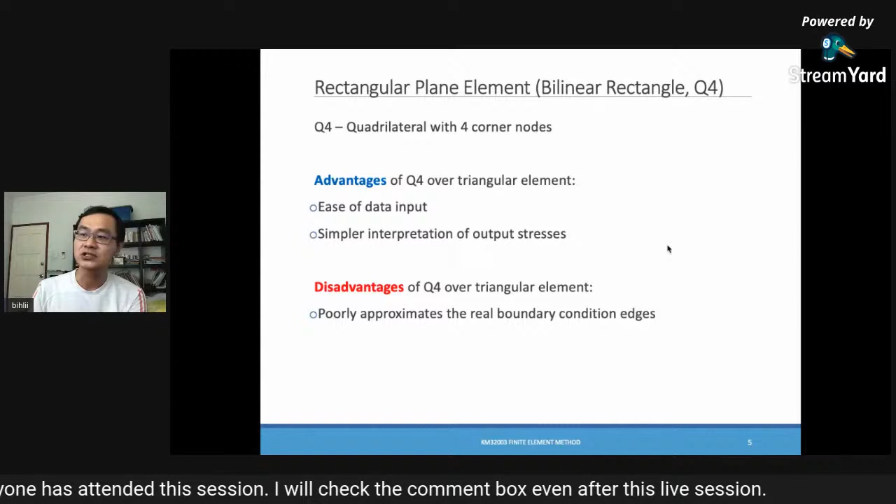So the advantages of using this Q4 over the triangular elements is the ease of data input. You can easily enter the coordinates and so on. Then there is simpler interpretation of output stress, easier to calculate. But there are disadvantages of the Q4: they poorly approximate the real boundary edges, especially when there is a curve. So if we use a rectangular type of element, you may have difficulty to actually approximate the curved part, right?

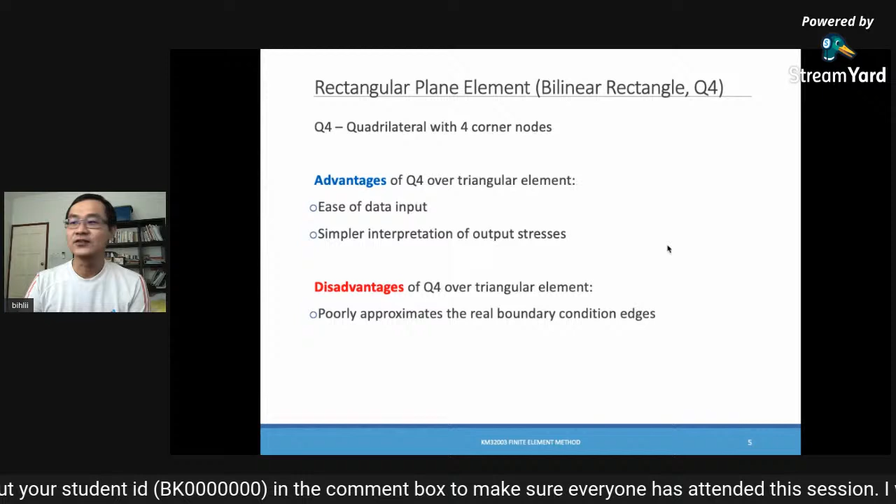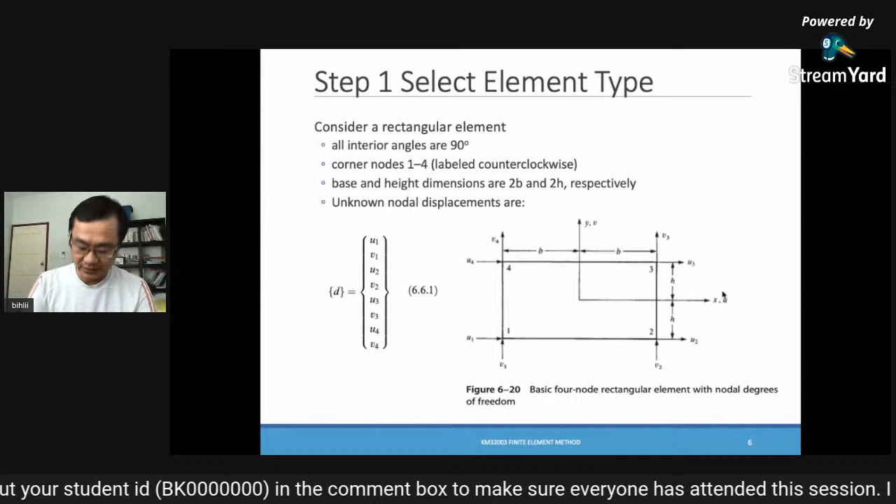So the steps to derive this Q4 are very similar. We will just go through as quickly as possible. So step 1, you will have to select the element type. Here we try to see how to derive the Q4. The Q4 basically is just a rectangular element with 4 nodes. You have seen the nodes 1, 2, 3, 4 being labeled in the counterclockwise direction. The base and the height will be 2b and 2h as given, and there are unknown nodal displacements.

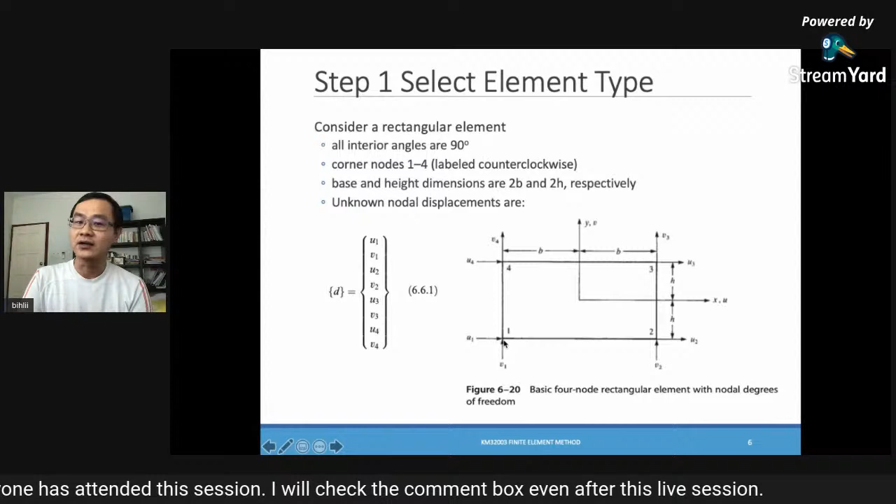So for these unknown nodal displacements, as we can see, there is u1 and v1. u1 and v1 represent the displacement along the x direction and the y direction for node 1. So you have node 1, node 2, node 3, node 4. Every single node has 2 degrees of freedom. So there will be 8 unknowns for the nodal displacement, right?

Then we will start to select the displacement functions. Since we have 8 degrees of freedom or unknowns, we will have to create the displacement functions with 8 constants. So we have a1 until a8. For u, we have the linear displacement function u = a1 + a2x + a3y + a4xy. Similar for v, right?

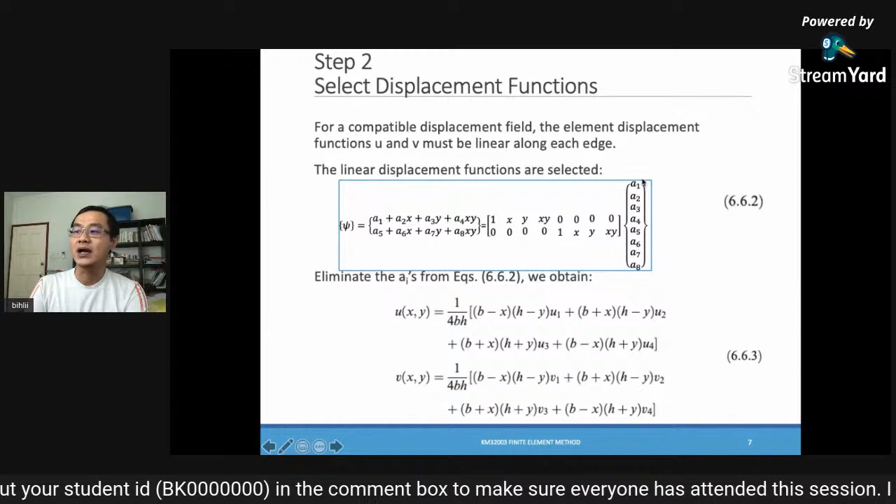So how can we do this? We just go through the previous lecture. We have tried to formulate the shape functions by using this. What we can do, we will form them into a matrix, a1, a2, a3, a4 until a8, in order for us to eliminate the constants a. So here you can form the matrix [1 x y xy] to multiply by a1, a2, a3, a4 to get the u linear displacement function. Similar for the v displacement function, we have this matrix.

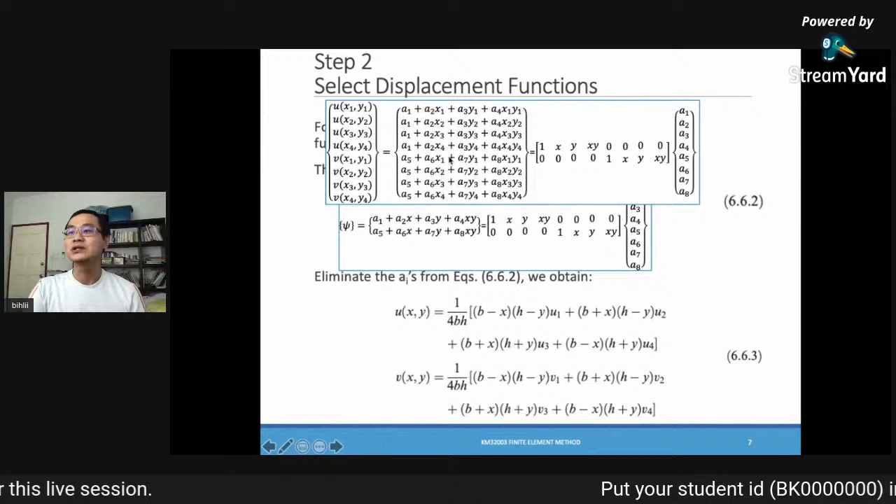So if we want to solve for a1 until a8, we need 8 simultaneous equations. So we write them or expand them into the nodes. Since we have 4 nodes, 1, 2, 3, 4, we rewrite the equations for each of the nodes, corresponding to this. Therefore, from this function, u(x1, y1) represents u1, and u(x2, y2) represents u2.

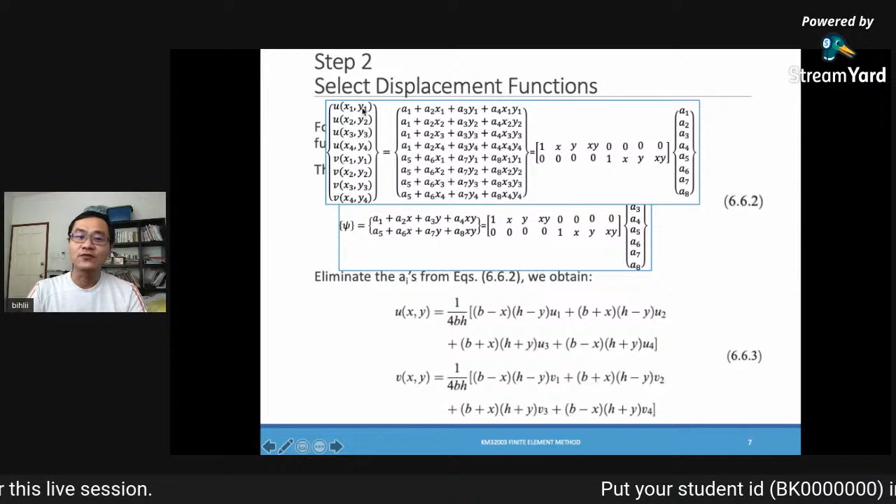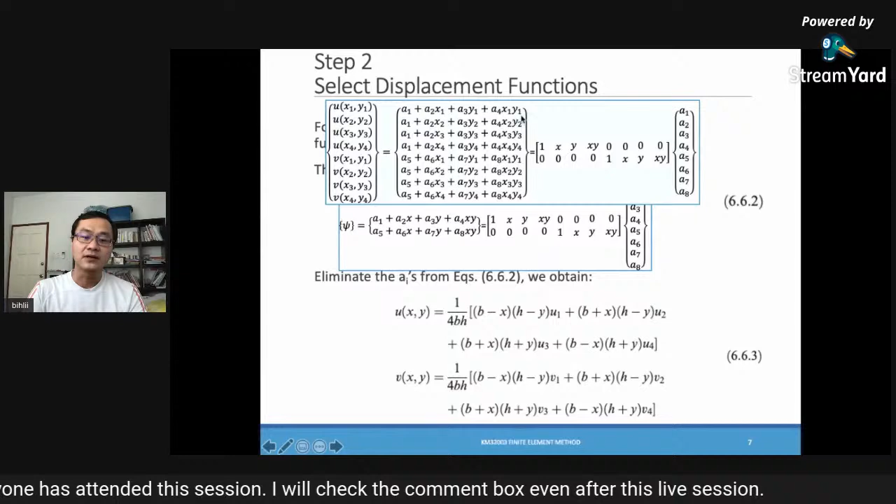So what we can do is form the simultaneous equations. You have u1 = a1 + a2x1 + a3y1 + a4x1y1. So that is how we can form the equations, and we can run through the 8 equations. These matrices are just to help you run it in a program, so that it can do the calculations and solve it on its own.

All right, so by doing that, we have 8 equations, solve them simultaneously, then you can solve for A1 until A8. At the same time, we can try to eliminate to form these U and V equations. So eventually when we remove all this, we will obtain this linear displacement for U and also for V, as given in equation 6.6.3.

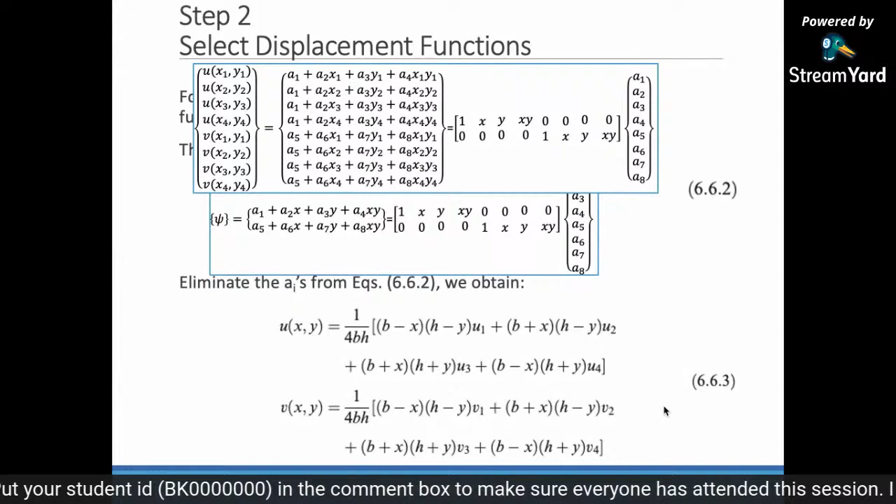So now from that equation itself, if we try to locate this kind of form, we will see that the shape functions appear. The N appear from the previous equations. So this shape function itself we can write as N1, N2, N3, and N4, which represent the shape function at node 1, node 2, node 3, and node 4.

So graphically, for us to visualize, the shape function at node number 1, we can see that the weightage or the value at node number 1 will be equal to 1, for both x direction as well as y direction. So if we want to directly check whether the shape functions derived are correct or not, we can have a quick check actually.

We can form the linear functions for this part. So this represents how the weightage actually changes, shifting from node 1 to node 2. So if we form the linear equation, this is just y equals mx plus c. We can get N1 equals minus x plus b divided by 2b, to represent this particular part.

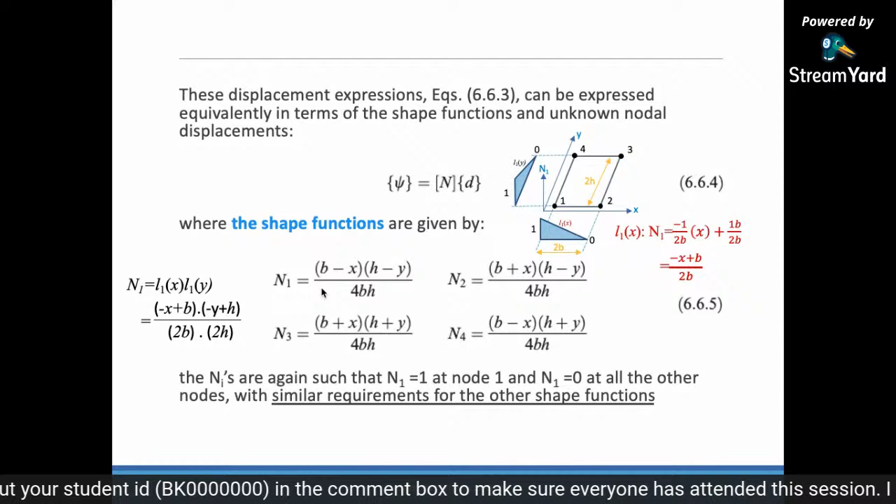So once we have the shape functions, now we can rewrite them in a matrix form. In this course, many times we rewrite them in matrix form so that they can be systematically computed, just like what you have learned in numerical methods. You can do this using MATLAB, Scilab, or even Excel. So if you don't have those tools, you can always depend on Excel to run your calculations.

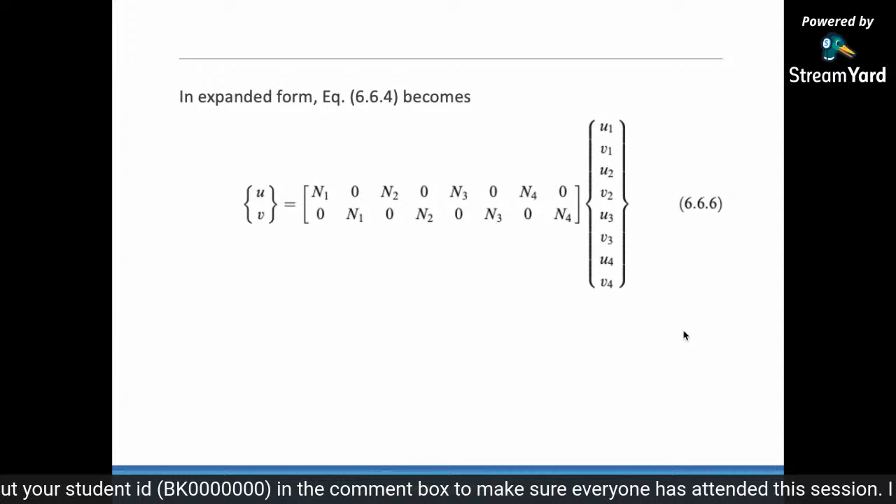Excel has built-in functions to solve for matrices. So you just Google from there, you can solve them. But there are some limitations on the size of the matrices, so you have to be aware of that.

So once we have obtained that, now we move to the strain-displacement and the stress-strain relationships. For this part, it's very similar. We already have our defined relationship for the strain in X, strain in Y, as well as the twisting part of the strain, given by this. So here, what we do, we just do the partial differentiations with respect to our previous equations.

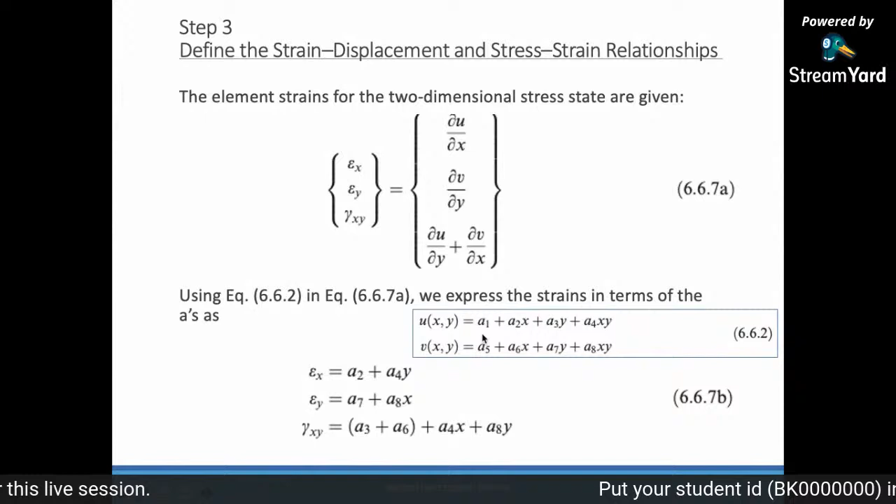So since we already know A1, A2, A3, and A4, assuming that you already performed the simultaneous equations previously, we can calculate accordingly. So if we take derivatives with respect to X, we will obtain this equation. With respect to Y, we will obtain this equation, and so on.

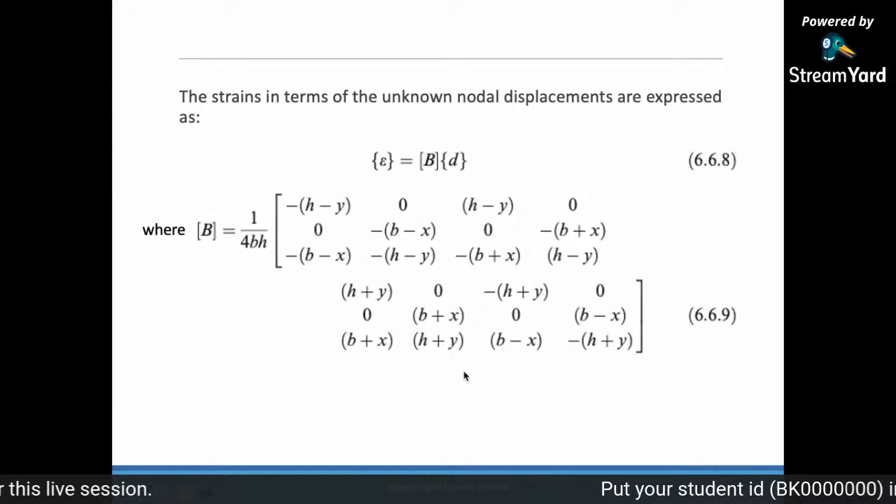And then all these strains are related to the nodal displacements. So again, we try to rewrite in this form, and we identify or separate them from the displacements, the unknown parameters. So we notice that there is this B matrix. So this B matrix is given as such. So you can try that on your own.

Similarly for the stress, once we know the strain, we can always calculate the stress, where this stress is just a multiplication of matrices, depending on your problem. If it is a plane stress problem, then we use equation 6.1.8. If it is a plane strain problem, then we use 6.1.10. So when we multiply them together, we will obtain the stress matrix.

So all these are computationally intense. So you can try it by hand, but later on, the computer will do better.

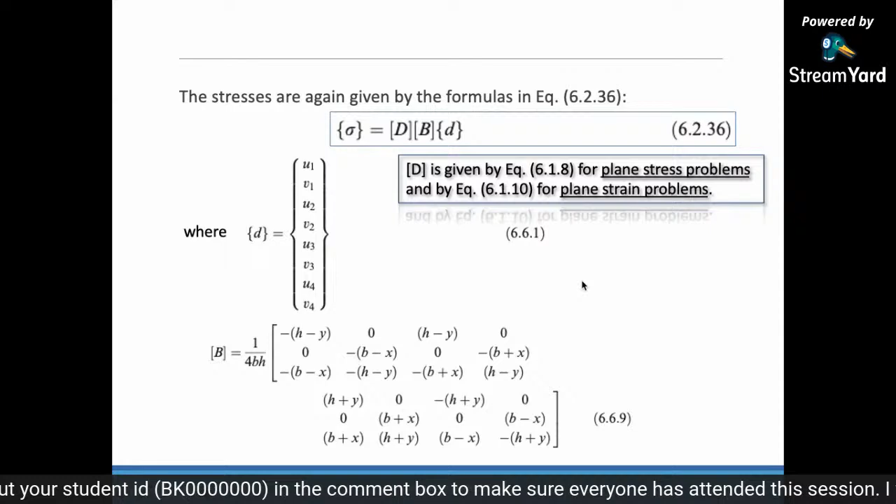Then after we obtain that, we will start to derive the element stiffness matrix and equations. This part depends on the stiffness matrix defined by the integral, a double integral given in the previous lecture. Here we rewrite it as 6.6.10; you can always look back at the previous equation numbers. When we integrate these double integrals, we obtain what we want: the element K, the stiffness matrix itself.

These double integrations are mathematically represented here, but in the computer or the software itself, they run numerical integrations. That's why methods like Newton-Cotes or Gauss methods come in. These are common methods used in the software itself.

Different methods have their advantages and disadvantages, but most software now tends to use Gauss quadrature methods to solve the integrations. The numerical part on how to solve them is not part of this subject. It's just knowledge. If you are interested, you can always check that on your own.

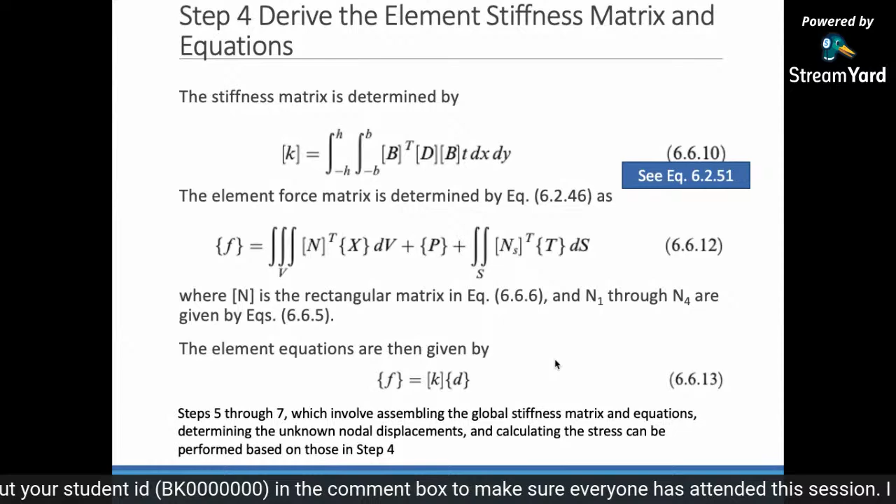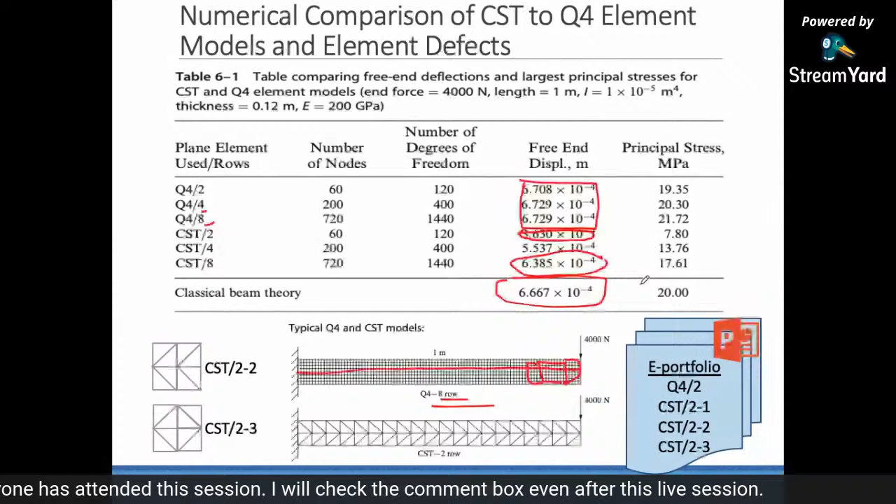For the e-portfolio, as I mentioned previously, try to simulate these conditions again. Since this uses 1 meter, you may have a lot of nodes. So I recommend you define your own conditions: half a meter, 0.2 meter, up to you. Form your own problem, use the same cantilever beam, apply your force, and check the displacement and stress corresponding to the theory. I would like you to do only four types of conditions.

The first one, the Q4 with 2 rows, then the CST with 2 rows again, but this one is a different way of meshing. You can see that the meshing directions, the load is pointing with an arrow like this. The CST-2, I wish to see the opposite direction. And the third mesh way is in this form.

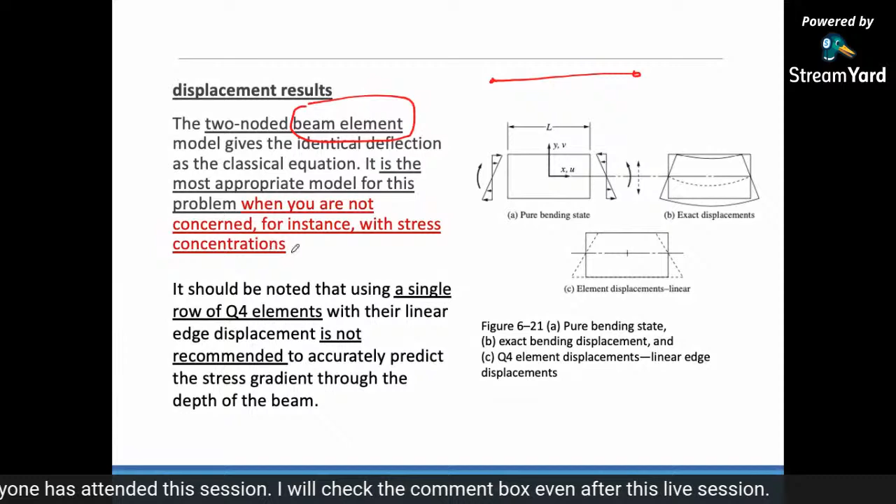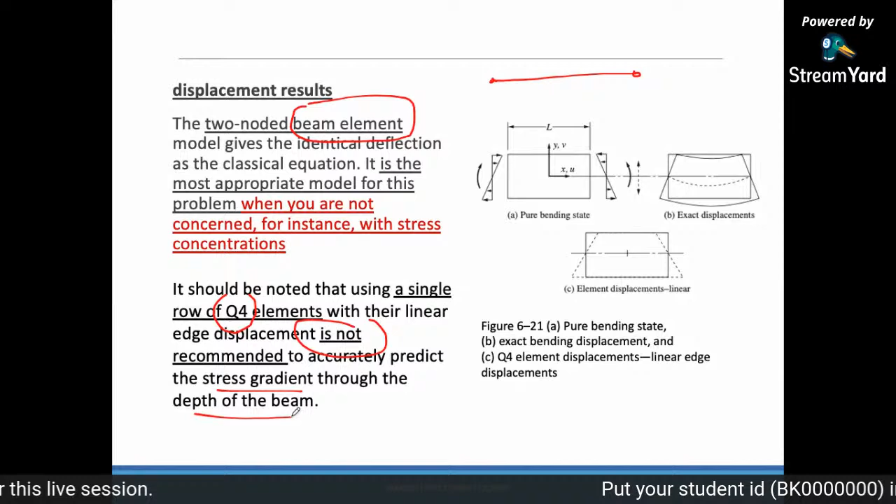So this is the general idea of it. Note that a single row Q4 with linear elements is not recommended, because of the behavior of the linearly decreasing or changing stress. There is a stress gradient through the depth of the beam. That's why, if possible, use 2 or more rows.

This is where, when we model the finite elements, the direction of the force is important. It helps you decide the number of meshes along that particular direction. So this is critical information for you when you're doing the modeling. So here there is one famous, or maybe popular, keyword.

Shear locking. Shear lock itself is more commonly known, or in other words, they may call it parasitic shear. What happened is, as we can see in the previous example, the CST itself produces poor results.

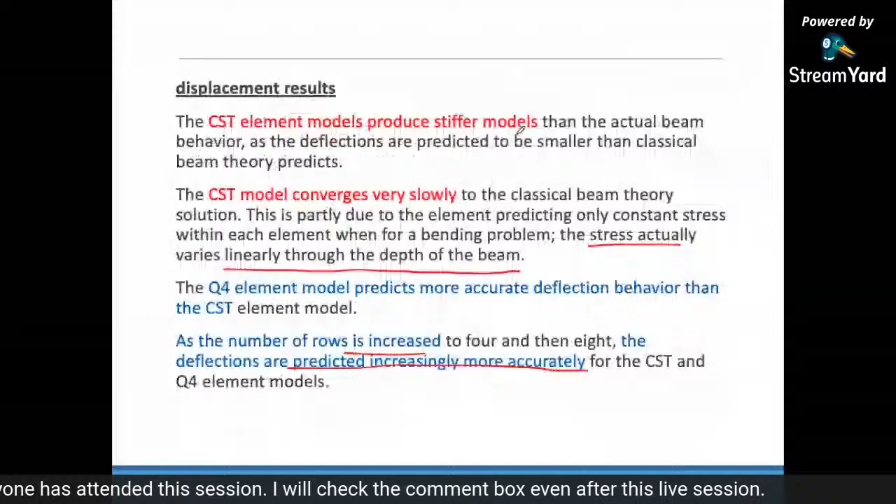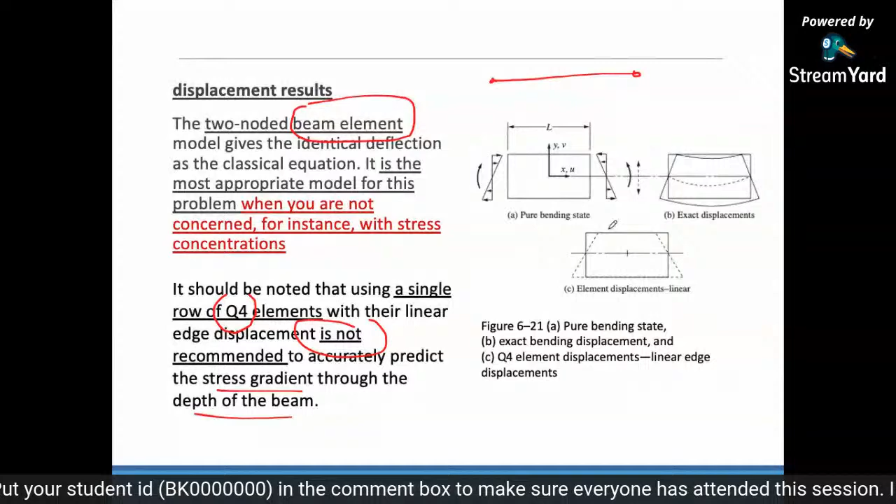Because you can see with this element row, the displacement is very small, meaning the beam itself is very stiff. Why does this happen? We call this phenomenon shear locking. In this shear locking, the CST has a false shear stress that occurs inside, trying to absorb that energy. So whenever it absorbs this energy, the energy that's supposed to go for bending is now lost. So we call this phenomenon shear locking, or in other words, parasitic shear.

So what we can do: in problems where plane strain conditions exist, and the Poisson's ratio approaches 0.5, the maximum value of the Poisson's ratio, the mesh can actually lock. This is where it's confirmed to lock, meaning the elements or the mesh will not be able to deform anymore.

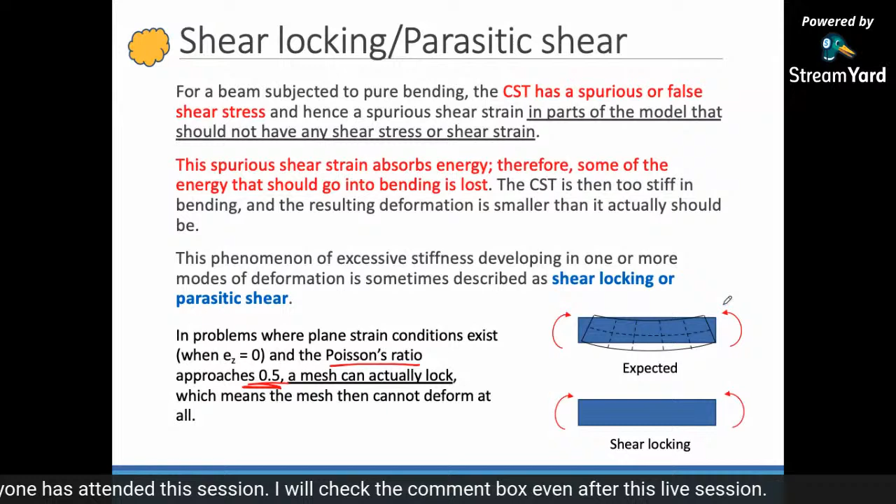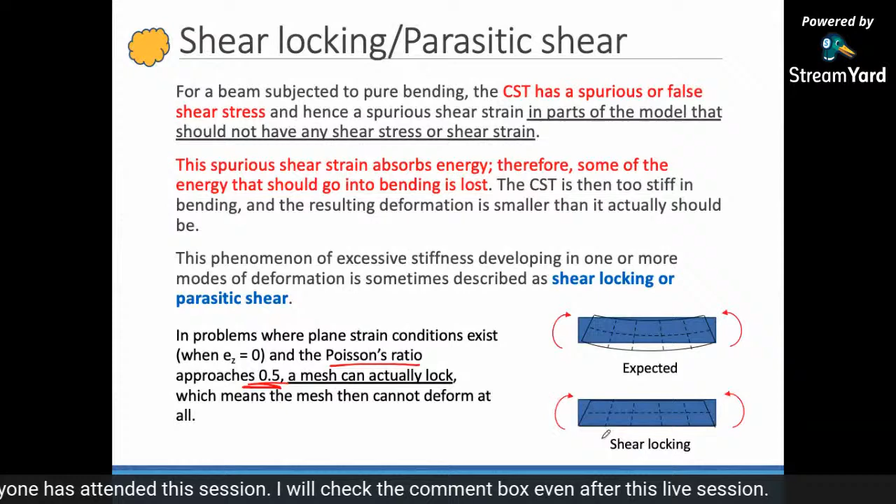So a simple illustration: this is a beam. When we apply a bending moment, in the actual case, we expect bending. But what happens in shear locking is that the displacement of the node shifts but does not bend down. That is what we call shear locking, and this will result in error in the stress itself, because there are no changes in terms of displacement throughout other nodes along this member.

So as we can see, the shear stress itself is dependent on the displacements. So the first thing, whenever someone tries to analyze the FEA results, the experts will always look at the displacement result first, even though the intention is to check the stress, because the displacement gives us a visual, or more a visual kind of image, a visual type of effect that we can imagine.

If some forces are acting, you can predict visually, in your mind or from experience, how it changed. That gives us very important information before we check whether the stress changes correspond to the displacement itself. So first thing, check the displacements first, whether they correctly represent the actual conditions or not. Otherwise, whatever stress results you get may not be true to the real situation.

In order to mitigate all these problems, we can always use a finer mesh, depending on the computational capability of your computer. We can always refine our mesh to allow more bending to occur.

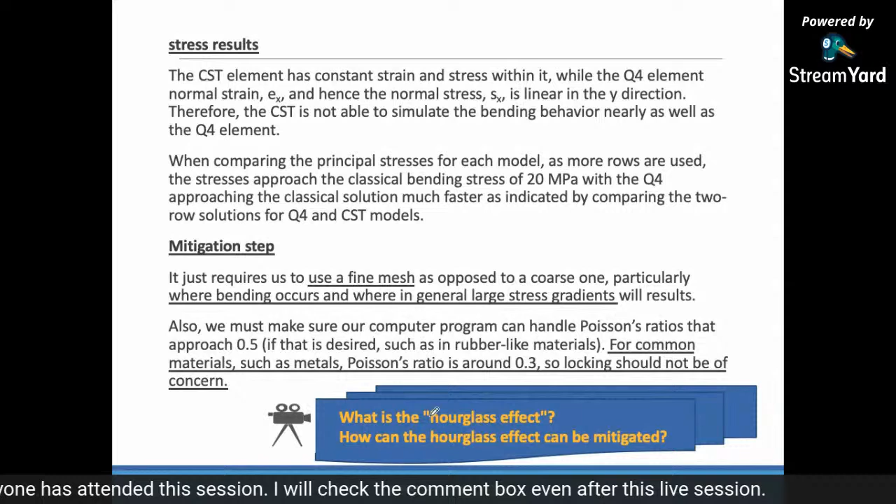So here is one tutorial question. You can try it on your own. Any questions so far?

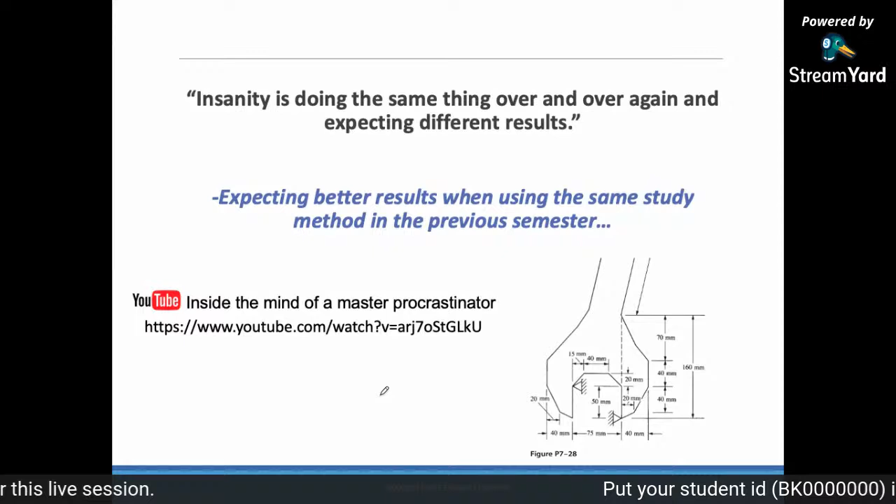Okay, so no questions, then we will move on to the next part, which will discuss more on the difficulty in modeling itself and what you can do during the meshing, the typical way of doing it. So the difficulty in modeling is that the phenomena or process itself is not understandable, because it highly depends on knowledge. If you know more about the physics phenomena occurring, it will help you model better on the real conditions.

This difficulty in modeling will include things like choosing the proper type of elements, understanding the type of boundary conditions, as I've mentioned, and the physical phenomena occurring or imposed on that particular process or problem. Then also the kind of load - what are the numbers and how you get all these, where they are acting, the locations, the magnitudes - in reality, we just apply it, right?

So there is load, but in actuality, how do we get this number - 1 Newton, 10 Newton, 100 Newton - we don't know, right? So we have to have this basic mechanics or fundamentals to help us estimate all these values and how they can be located in the model itself. Free body diagrams will help you actually locate all these locations.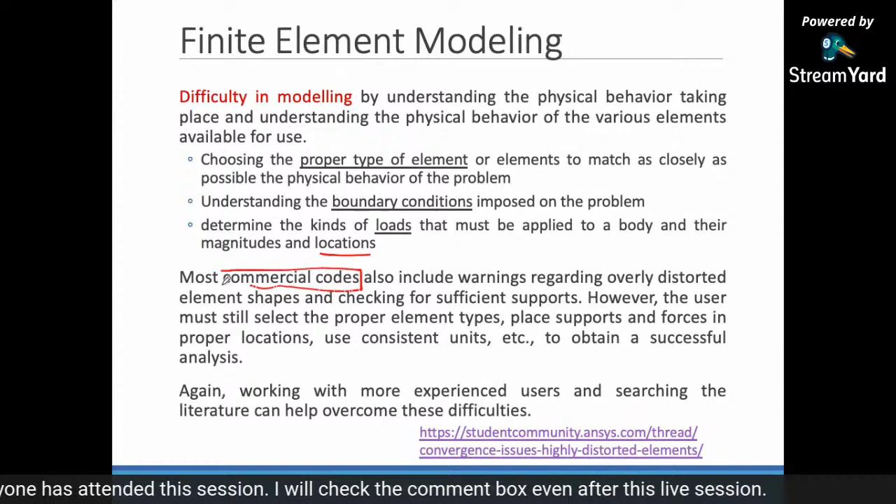Most commercial codes - they will usually call it commercial code - because the program behind it is the code, and that code is the intellectual property of that software.

So those codes will give us warnings like overly distorted element shapes, checking for whether there's too much support or no support. When we apply a force and forget to give support, then the object itself will fly when we do the simulations. So all this is up to the users - that's why all this knowledge will help you. The more you learn and practice, the more you know what kind of difficulties arise.

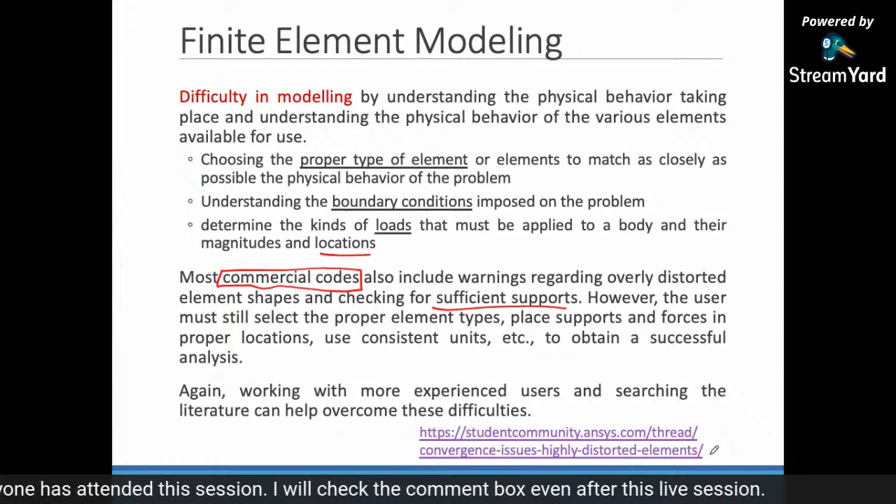So you can always search online - Google is your very good friend, as it is mine too. Search the literature to overcome this difficulty. For example, in ANSYS there is a student community that talks about convergence issues for highly distorted elements and so on. That will help you.

So the first thing the software or commercial codes will do to help you is calculate the aspect ratio. This is a very essential parameter that most FEA analyses will do.

Okay, they will check the aspect ratio. This aspect ratio is actually the ratio of the longest dimension to the shortest dimension of a quadrilateral element. For example, in this diagram itself, the aspect ratio will be 24 - very long and very short on the two edges.

Then it slowly changes to 6, 3.6, 1.5, 1.1, and so on. So what we can see is that this aspect ratio, in many cases, when it increases, the accuracy of the solutions will decrease - or the inaccuracy will increase. So the higher it is, the accuracy will decrease, right?

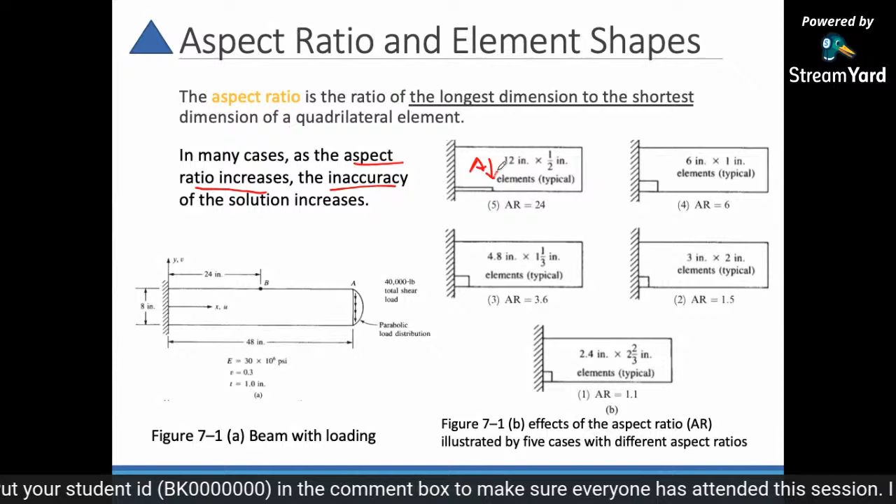So this is a study on how the percent error in the displacement actually changes as the aspect ratio decreases. So when the aspect ratio decreases, the accuracy actually increases - it's getting nearer to the exact solution.

So for a Q4 itself, we would like to have a low aspect ratio as well as the corner angle of the quadrilateral near 90 degrees. They can have something like this when they mesh, but if possible, as near 90 degrees as possible - unless you are doing the meshing algorithm yourself, you cannot control much.

You can only control several things - how it looks, you can do a remesh again to obtain good elements. But how the software does the meshing is their own algorithm. That's why there are studies or research on meshing algorithms as well, on how to mesh a good one that meets all these conditions.

So if you want, what we can do is, if let's say you have an object in these shapes, in order to get proper meshing - let's say you want proper meshing on this side which has a slant - what we can do is partitions. You can always do partitions so that when we mesh, it is always constrained with our desired angle.

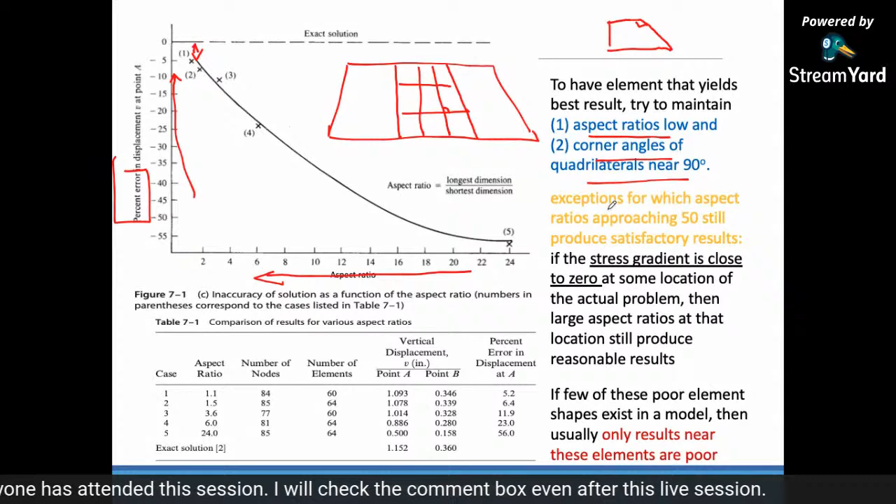So there are exceptions for cases where the aspect ratio approaching 50 still produces reasonable or satisfactory results. This is when that particular element itself is not subjected to a stress gradient - not much stress is actually acting on it, maybe some extra part - so then it's not relevant.

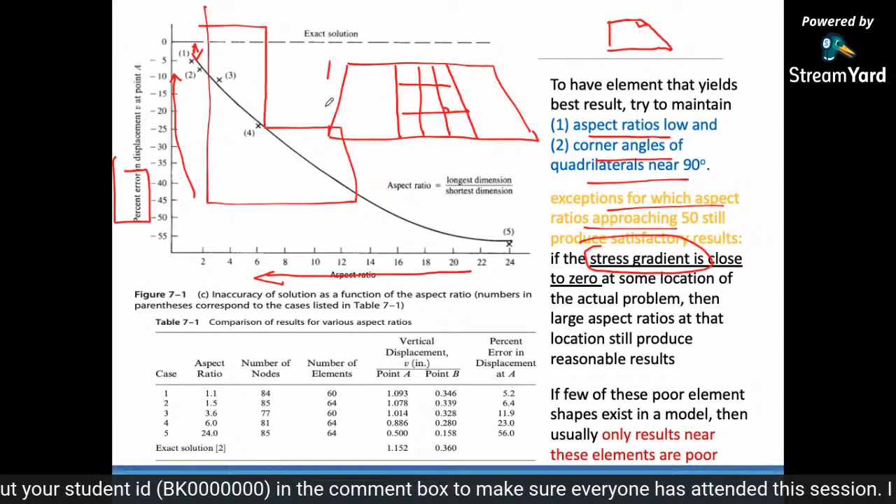For example, you have a structure similar to this, and you apply a force in this direction, and this is our so-called fixed support. So what happens is that this force will be transferred - all the energy will transfer - so the support will be mainly on this particular part. Whatever we do on this side is less significant, meaning this part, even though it has a bad aspect ratio, is acceptable.

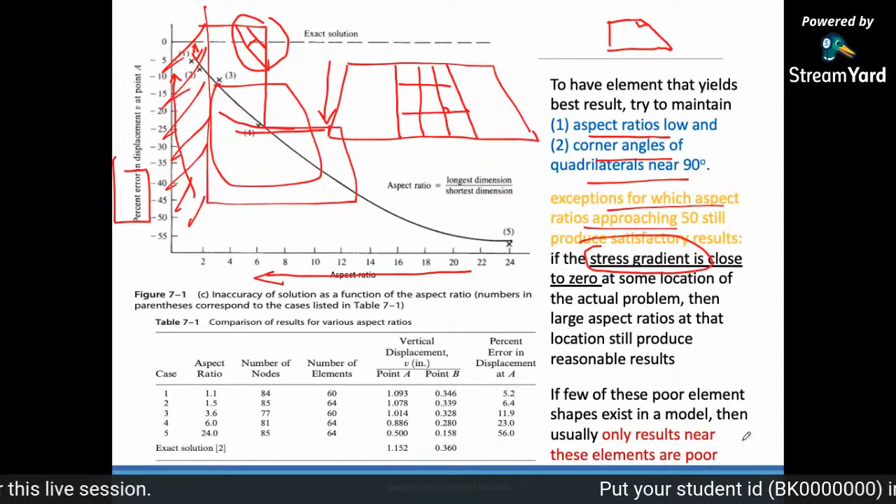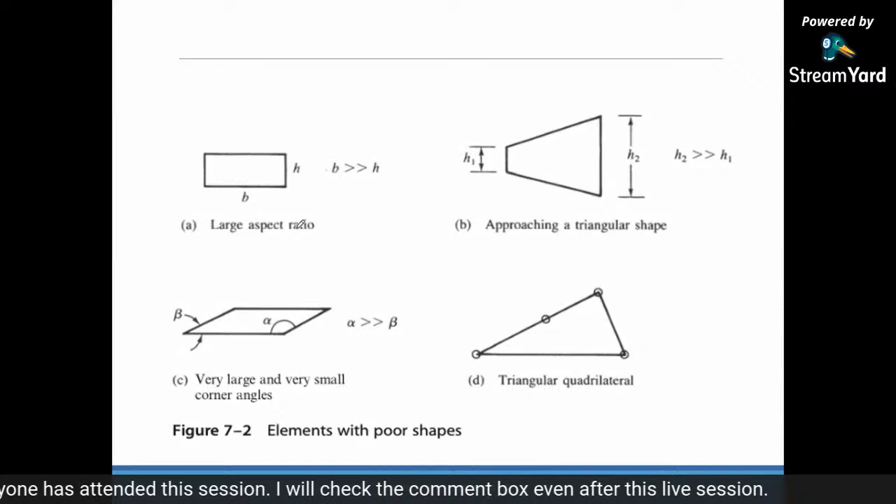Those poor element shapes in the model will usually result in poor results. So we can see elements with poor shapes - very large aspect ratio, almost like a triangle shape. Already a triangle shape even though this is a Q4, with a very large angle and a very small corner angle. We try to avoid all these things.

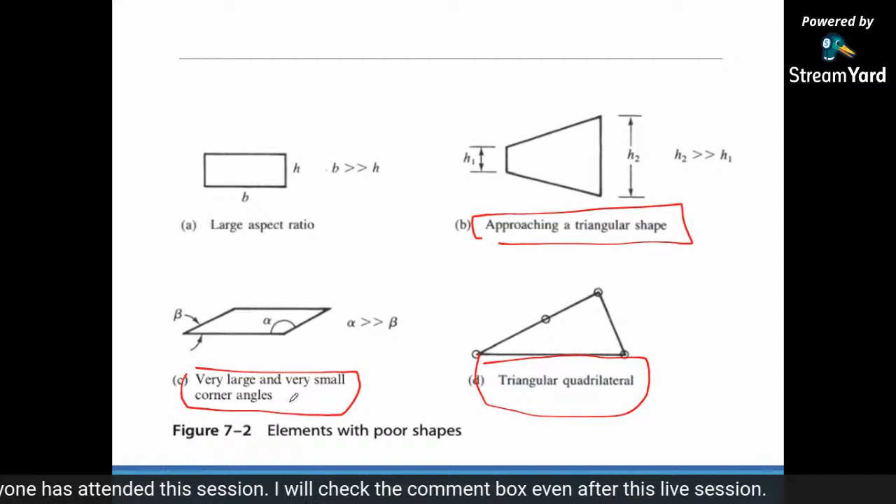But then we cannot control much. What we can control is doing partitions to minimize the number of this kind of bad elements.

You can always use symmetry cases, because we have, for example, this testing bar itself with fillets and so on. We can minimize the problem by analyzing where it is symmetric. This symmetry itself is good somehow to reduce the possibility of the meshing algorithm meshing in a way we don't want.

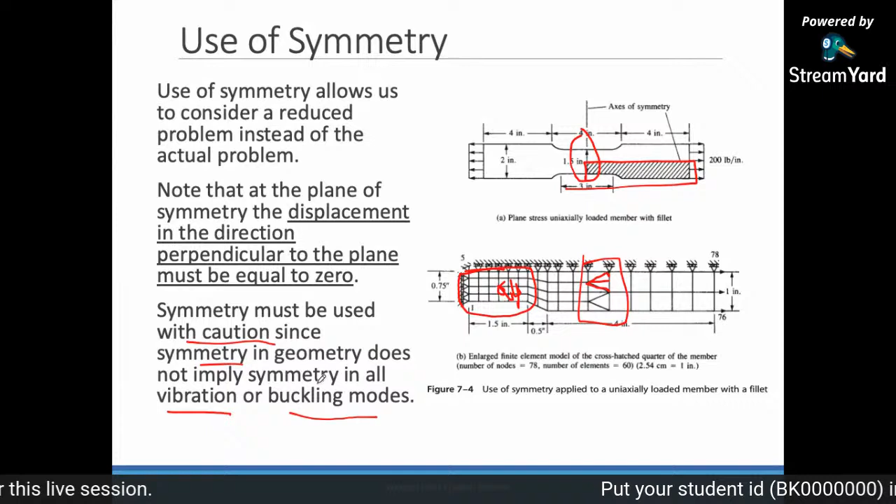Consider how the estimated result of your displacement will actually change. Is the displacement result symmetric? If it is, then you can use symmetry. If not, then you cannot, right?

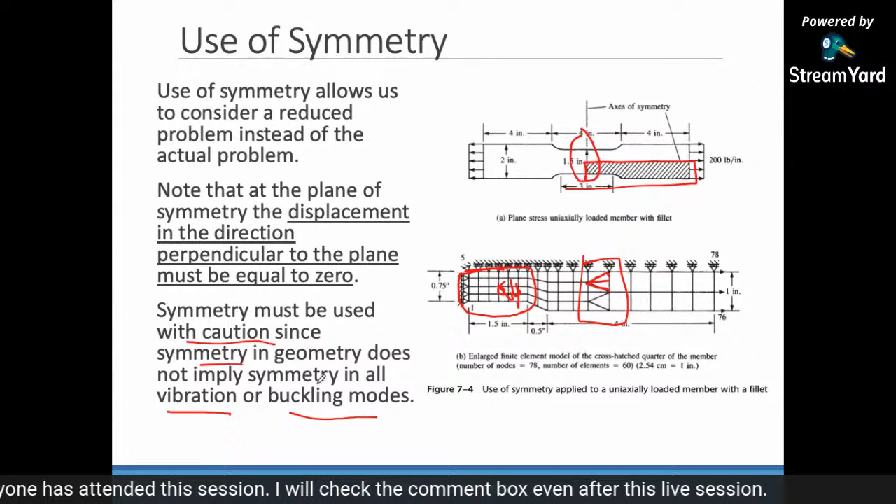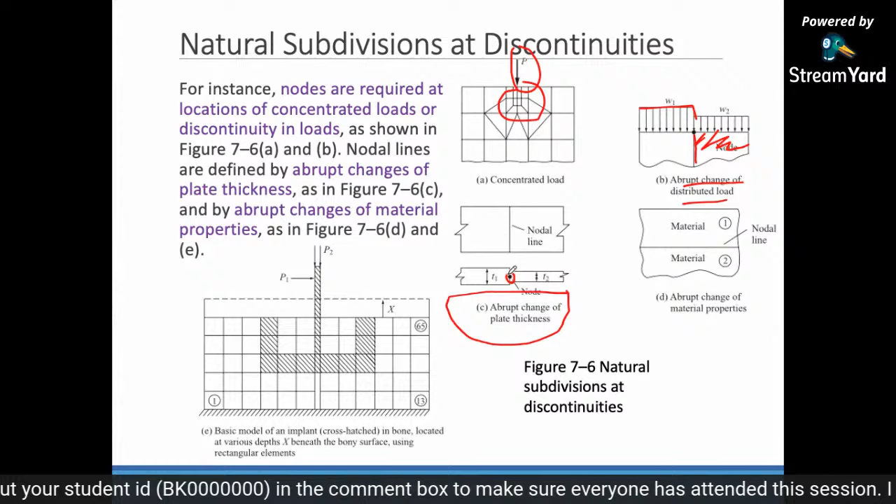Other cases include changes in the plate thickness. Suddenly the plate thickness changes, so we need to include an additional point to represent that change. So we have to do subdivisions or partitions at that particular point. Also, whenever there is a change in the material property, we have to cut it clearly to represent two different materials.

In some cases, there is some support embedded or implanted inside. This may be an implant in a bone surface. So we mesh differently for different materials. And we always ensure that even though they are meshed, the nodes are continuous, they are actually matched, right?

Unless you apply a different kind of conditions, like contact-type conditions, then the FEA software will treat them differently. Other than that, if we intend just to do a static or not really dynamic analysis, then the nodes must be matched together.

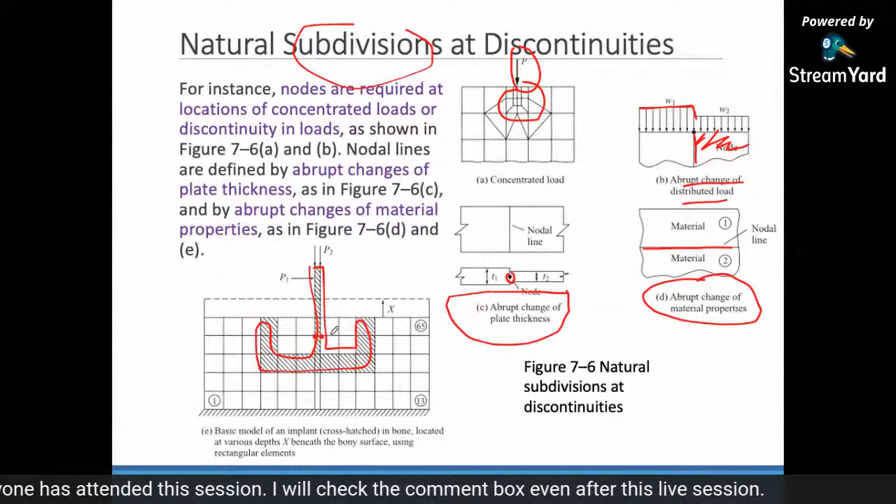Other natural subdivisions will be at re-entrant corners, our stress concentration parts, or at hole areas. So you can cut them into a quarter of the plate and simulate them. Then there is also the distributed load. You may want to naturally add meshing so that the distributed load is represented properly.

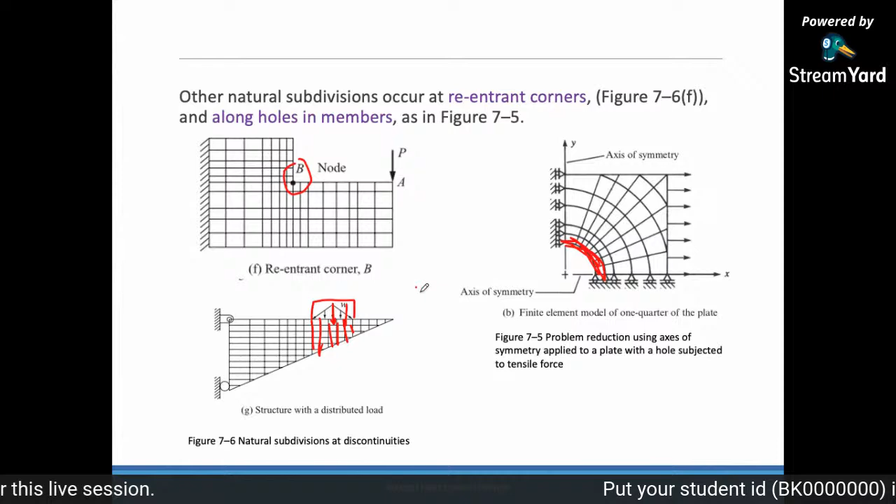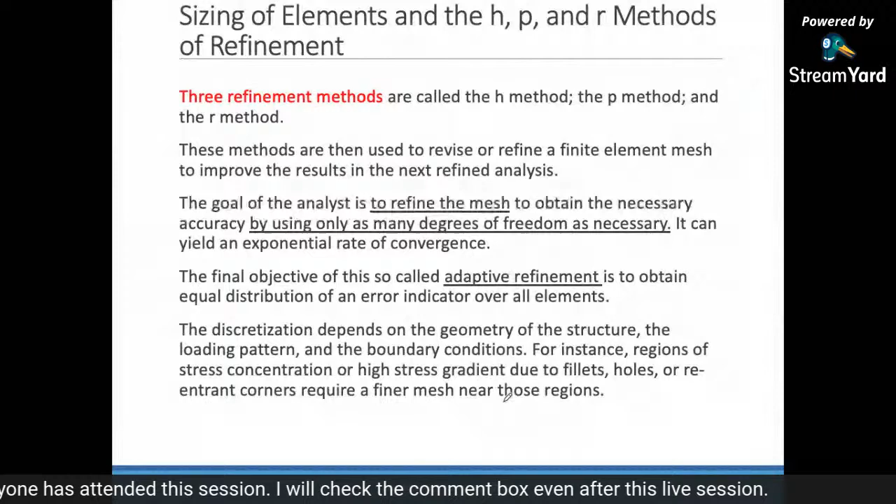For refinement methods, in general we can classify them into three: H, P, and R. You can apply these refinement methods by doing your own divisions or partitions, or the software itself has its own refinements, and the software uses the same terminology, H, P, and R.

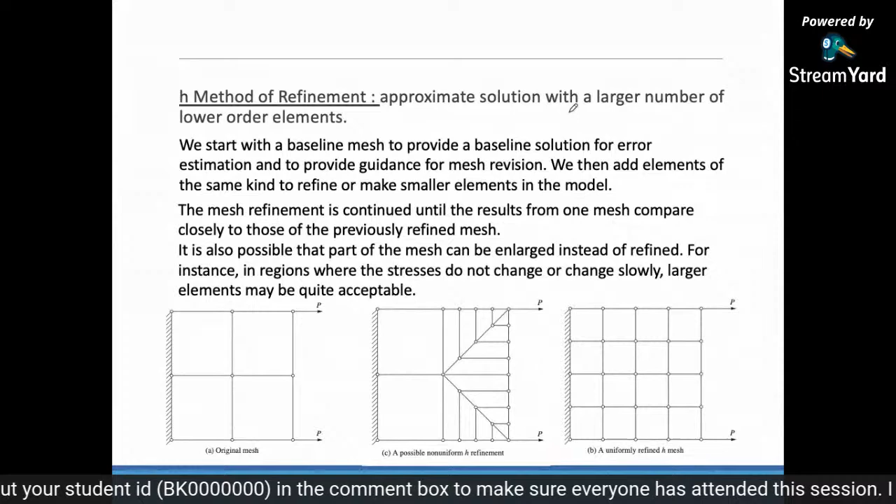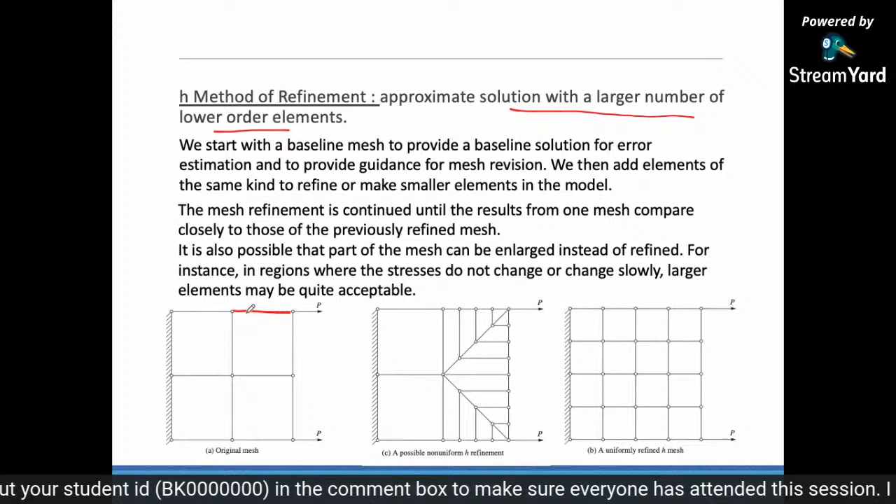The H method approximates the solution with a larger number of lower order elements, meaning single order, linear elements. So we increase the number of mesh elements. We can subdivide them into this form, or into a uniform mesh. We call this an H mesh, refined from the original mesh.

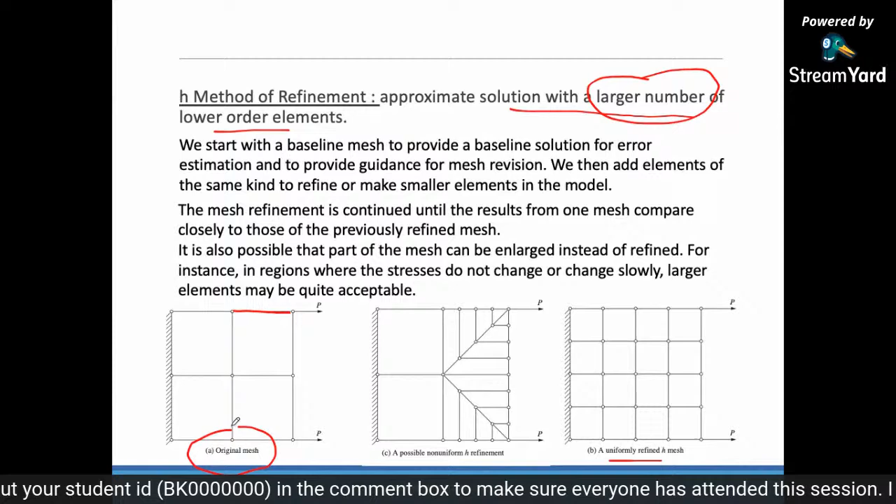Then the P method is very straightforward. We know that by increasing the order of the displacement functions, the accuracy will increase.

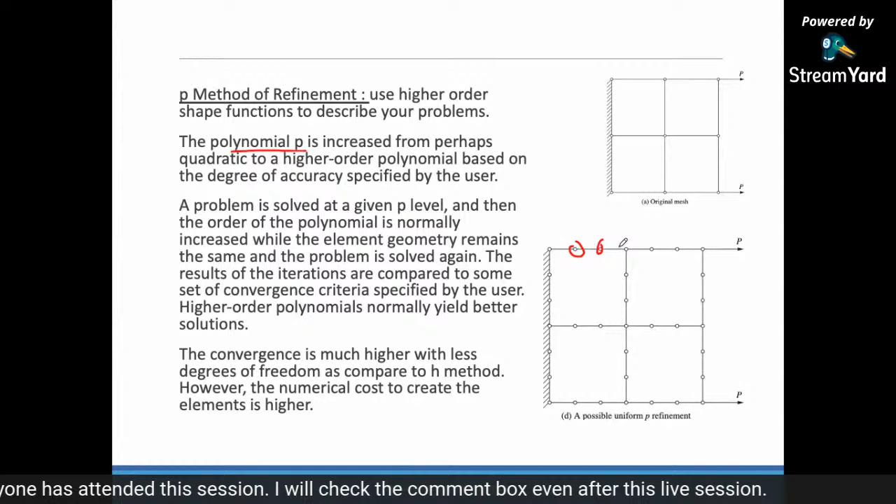Okay, but then you may have the problem with the memories and other things. So we can always increase this type by increasing the polynomial shape functions of the element itself, right? That is P, the polynomial. And the R methods of refinement

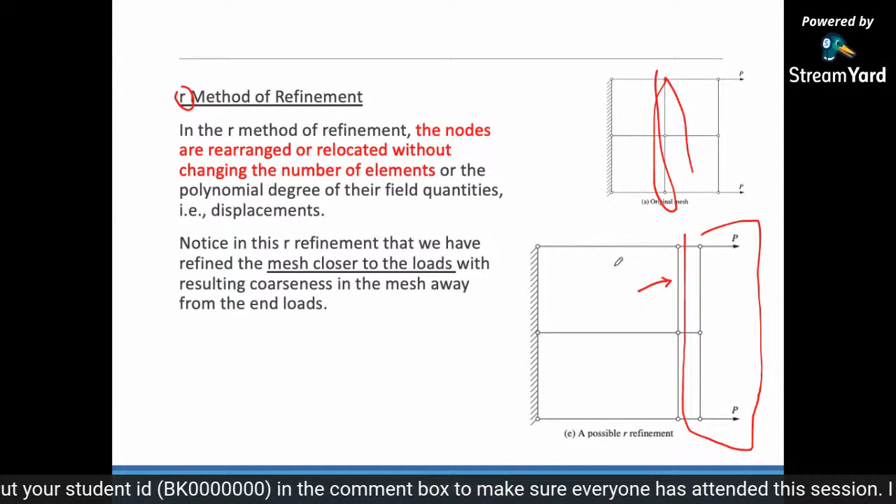is when you try to relocate. Based on our knowledge, we know that the force is acting towards the end. So what we do, we try to shift these elements nearer to the load. This is another way of relocating, so that this part becomes less significant. We know that maybe this is not significant, then we shift that towards the load. This is the R refinement method.

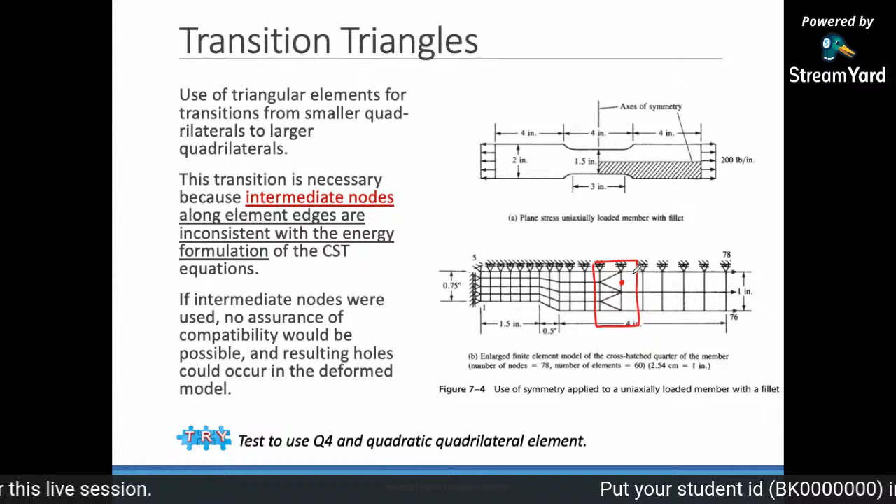Then for the concentrated load point, yes, we can have a load acting on one point. What we do, we remesh it. Near the point, we mesh it with a finer mesh. And theoretically, if we have one single point load acting in an infinitesimal area, this point can penetrate through any kind of object, just like a needle, right?

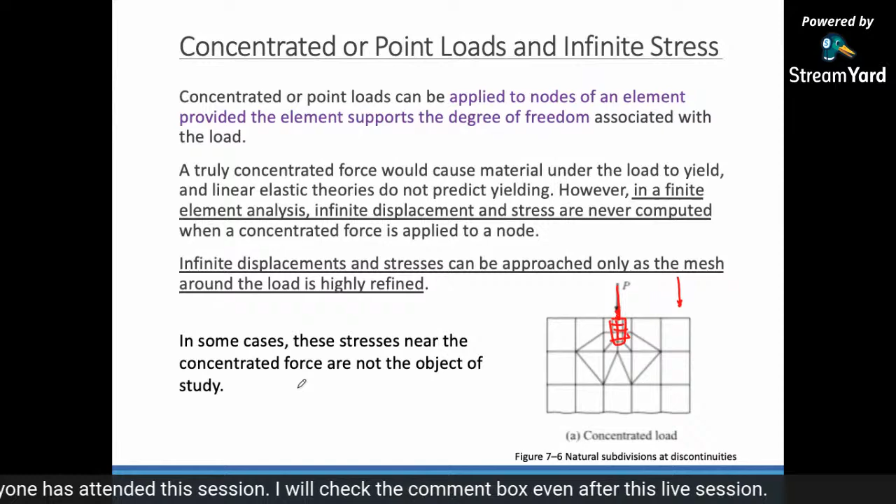In some cases, these stresses near the concentrated force are not the object of the study. We can have other ways to model the concentrated load by adding additional elements. You can do that, but I would not recommend it, because especially when you define the material property of your elements, this material property may behave differently when the load is transmitted.

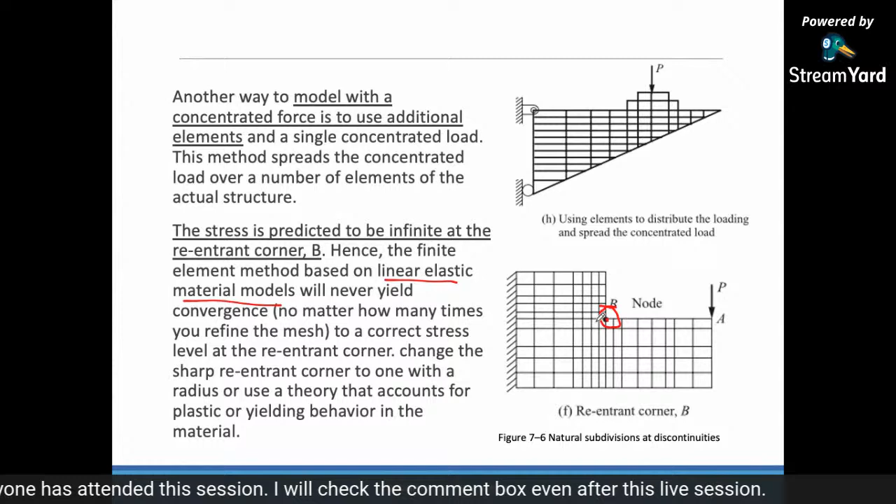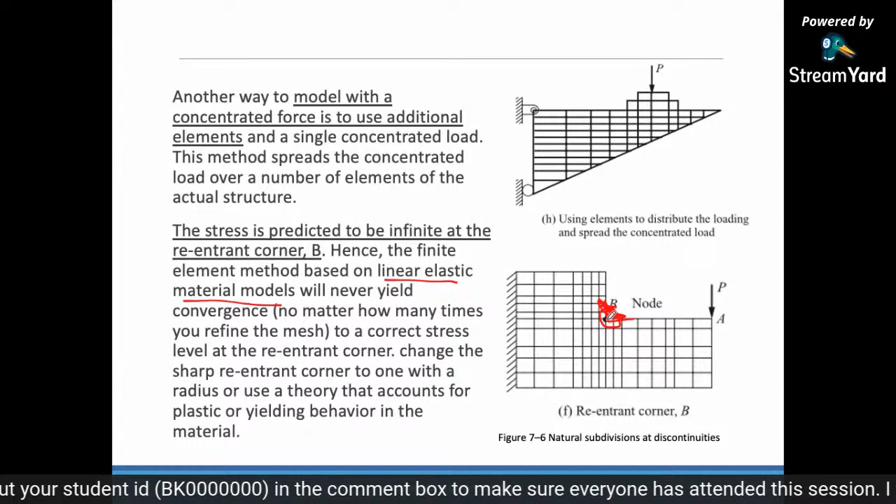Then also the stress is predicted as infinite at the reentrant point. This is a point, right? In finite elements, if we are using a linear elastic material model, we will never get convergence at this particular point because of these sharp edges. So what we can do is change it by putting a fillet to mitigate this so that there is a transition, or else it will theoretically calculate an infinite stress acting on that particular point.

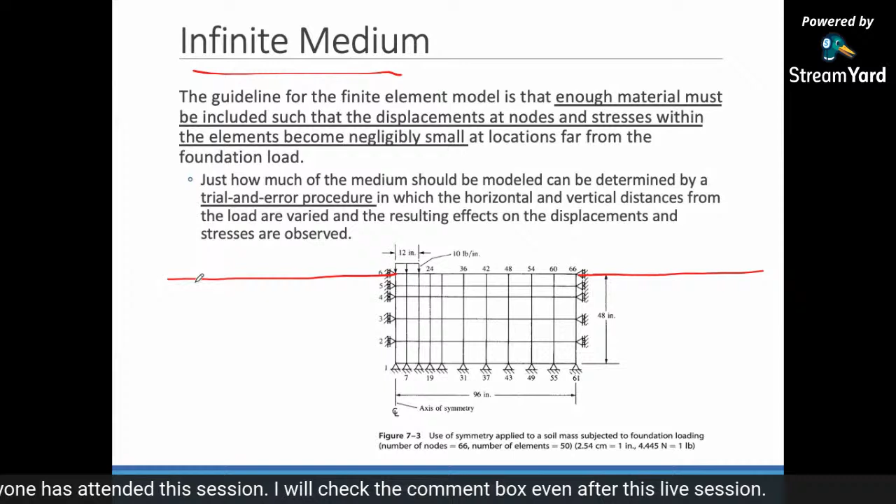If we want to simulate an infinite medium, let's say this is a foundation problem in civil engineering. Assuming this is ground, our ground is infinite, right? You're stepping on ground. So in order to model this, we have to decide where to cut. We do it using a trial and error procedure. We try to see how far a load acting on this particular point will affect. And when the effect is insignificant, we know this length is sufficient, then we can cut it off.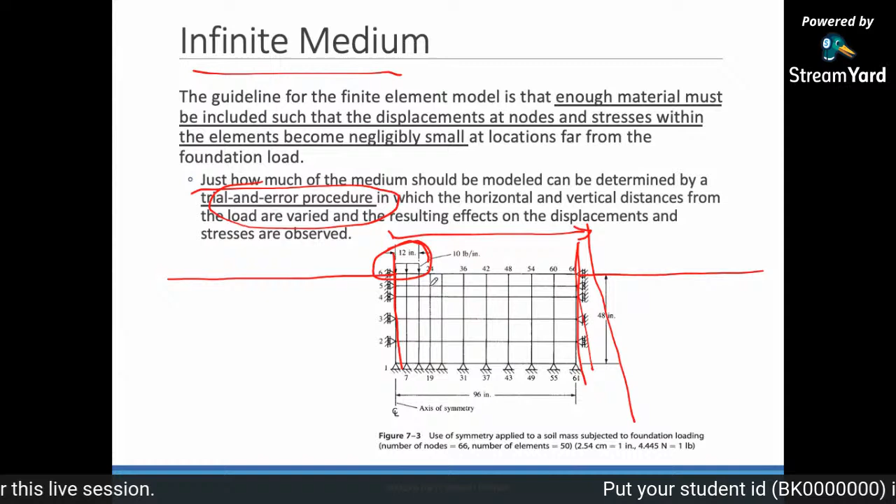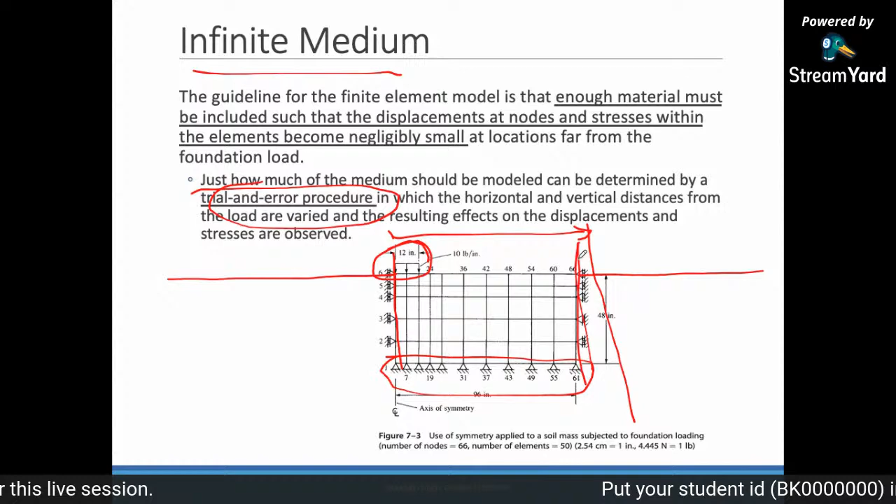So in these cases, we have to run a preliminary FEA test. We run it directly. Most of the time, we model it, describe the parameters acting on it, then put in our load and see the result and how it can be improved. And we see what happens at this end, whether it's sufficient to model the whole conditions.

Then also when we try to mix different kinds of elements, we have to know the characteristics behind each of these elements, because they have different degrees of freedom at each node.

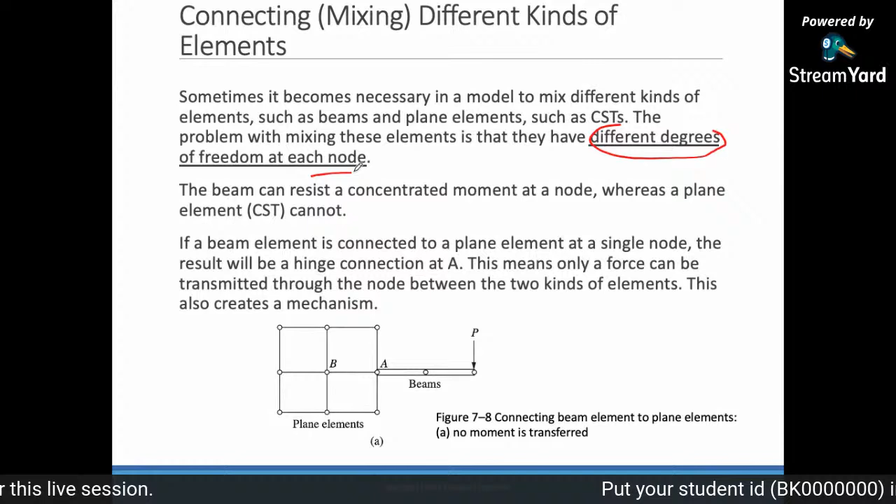For the beam, the node itself can rotate, right? But then for this Q4 itself, they cannot rotate, they can only translate. They have different behavior. So when we mix them in this particular form, meaning this point A is allowed to rotate, once we put a force, this beam will just go down. We create a mechanism. So that's why with mixing them, we have to know why. Have to be careful when we try to mix them.

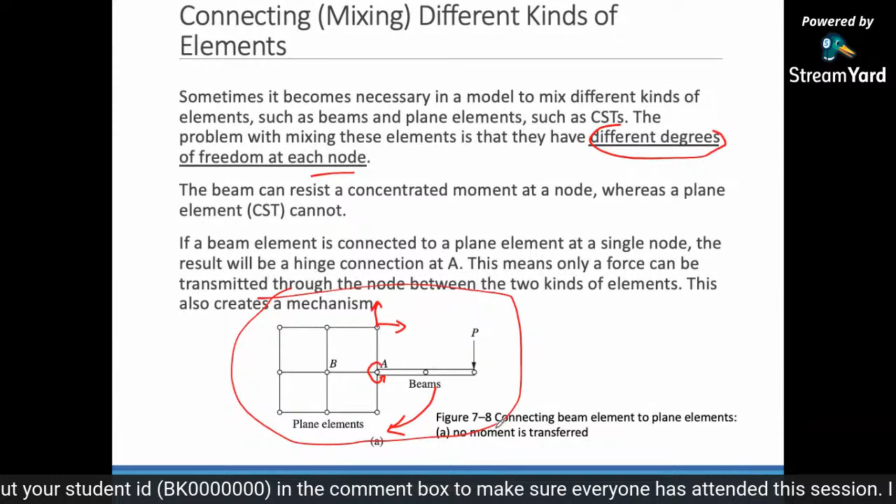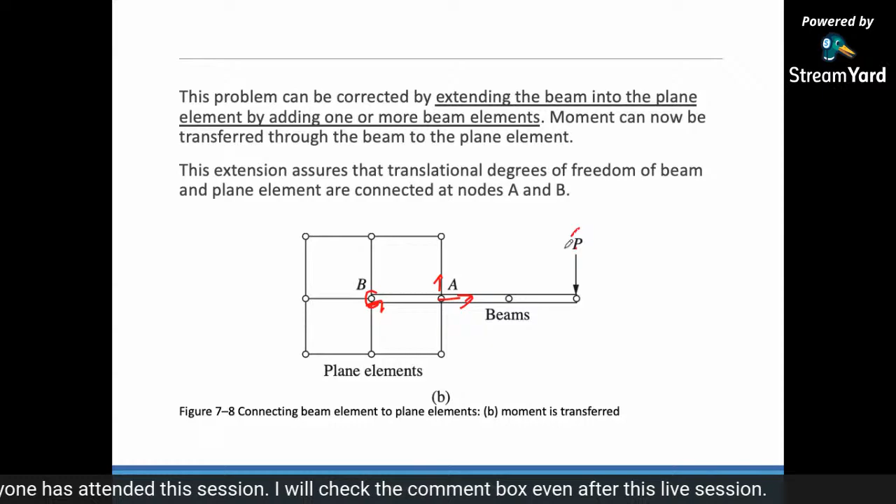So to solve this problem, what we can do is we extend it into the plane, so that the rotation is here, but then this rotation now is being constrained, since this point is only allowed to move in a displacement form. So in this way, the moment due to this P is now transferred to our plane elements, right?

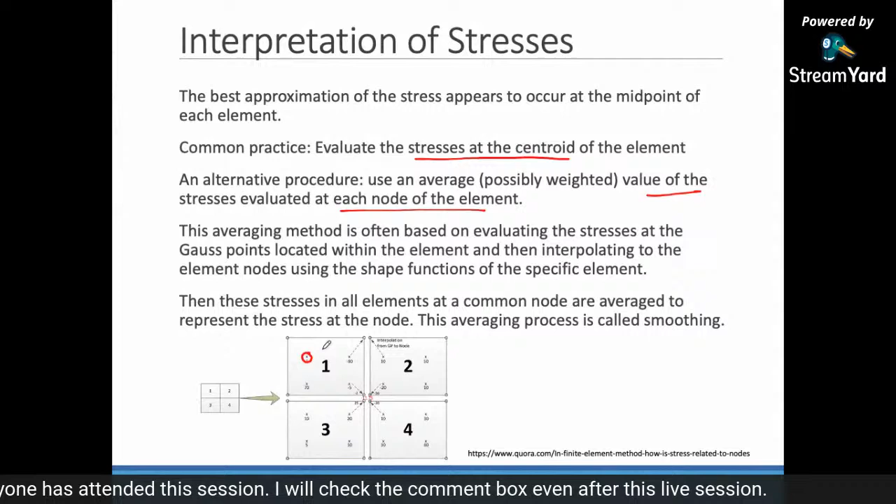In the interpretation of the stress, in general, or the common practice, those stresses are evaluated at the centroid of the elements. But alternatively, in most software, we can use an average, and this average is actually the values of the stress evaluated at each node of the elements. So how we evaluate: we can sometimes evaluate it at the Gauss point. We have 4 Gauss points for each of these Q4, right? So let's say we have four Q4 elements, as shown here.

This Gauss point value, once we compute it, we can transfer or extrapolate it to the node itself. So we call this averaging methods. Or when we see 2 elements are combining, this stress value is also being put to the same node, right? Remember, this node is a single node itself. So this node will do an averaging. We call it smoothing. So this is how the software can show you nice colorful gradients of stress, because they are doing a smoothing between them.

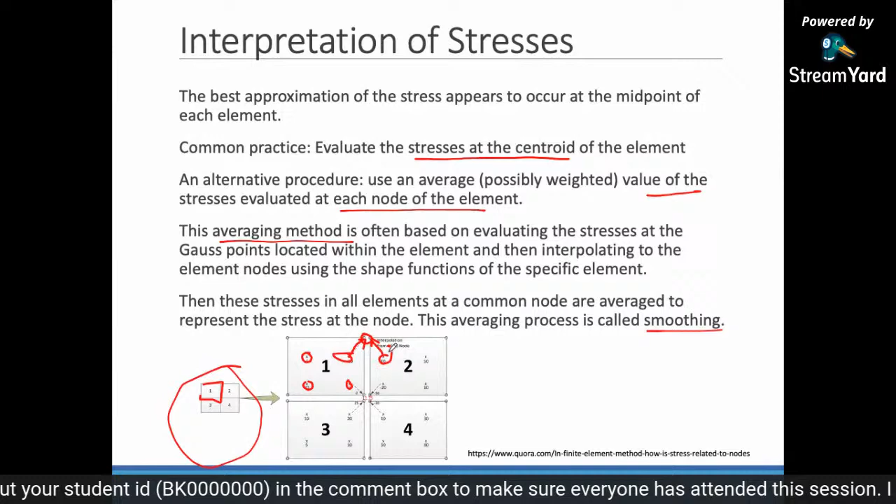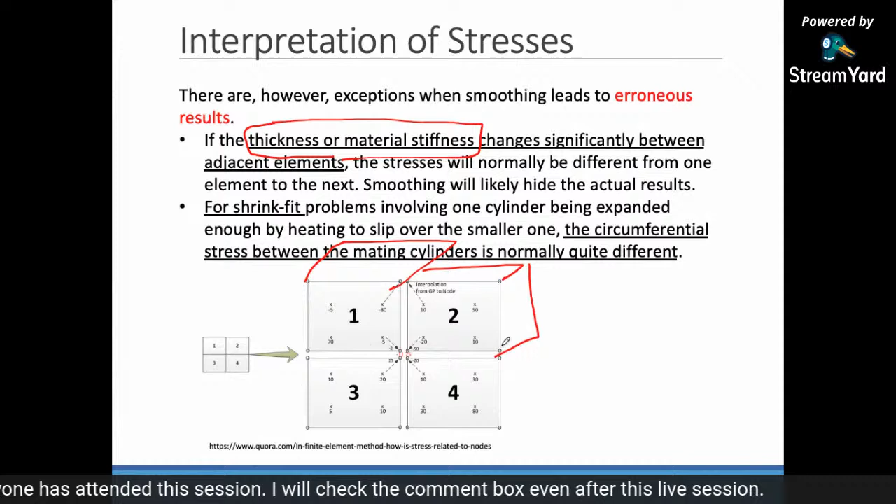But we have to take into consideration that this kind of smoothing may lead to some kind of error when we interpret it. This happens when there are changes in the thickness or the material stiffness. Meaning, if this is a very large element and this is a very small element, then this point, when we average them together, may not represent the real conditions, because this part is larger, so the stress may be lower, and this part is smaller, so the stress acting may be larger, but when we average them, they cancel out each other. That leads to some kind of error in the result itself.

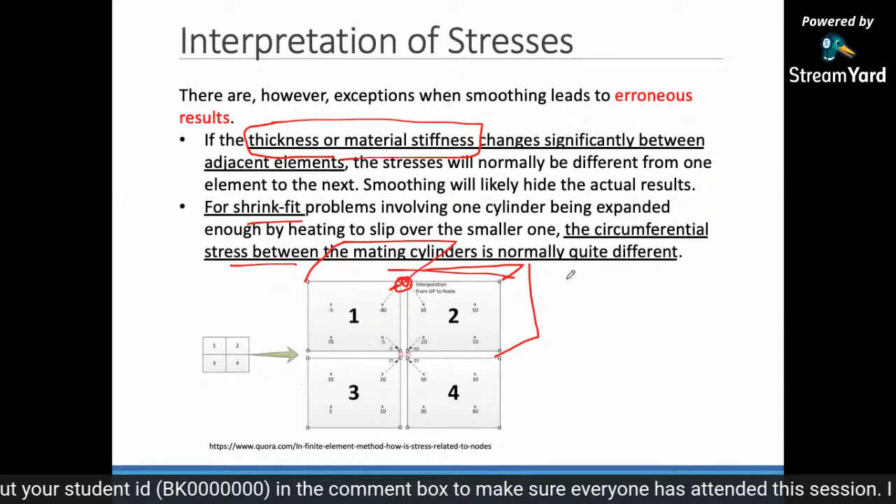Same thing for the shrink fit problem. The circumferential stress between the mating cylinders is usually quite different. So you have to take care of these connections between different materials and so on, even though it shows you very nice results.

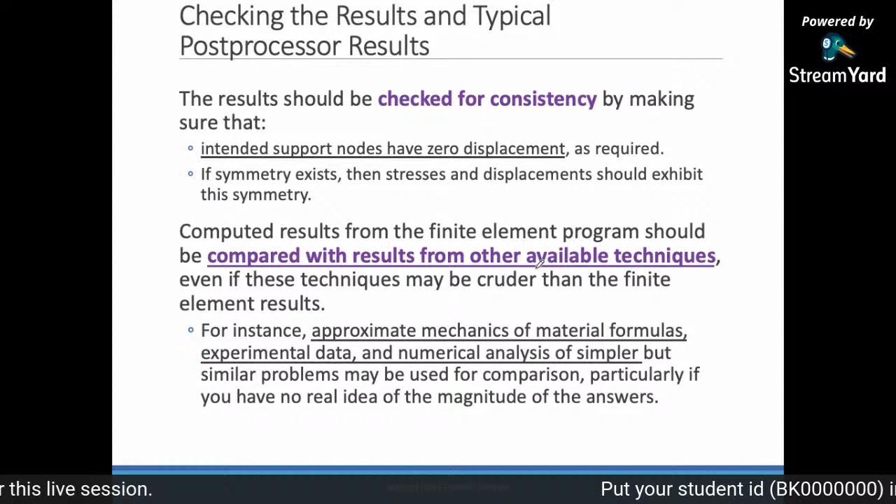In general, we will always check the results for consistency. As I've mentioned, first check the displacement characteristics or the displacement result and see whether it behaves as we intend or not. Then only we will check for other consistency. For example, we will check whether the support node really gives us zero displacement or not. If a symmetry exists, then it should behave like a symmetry.

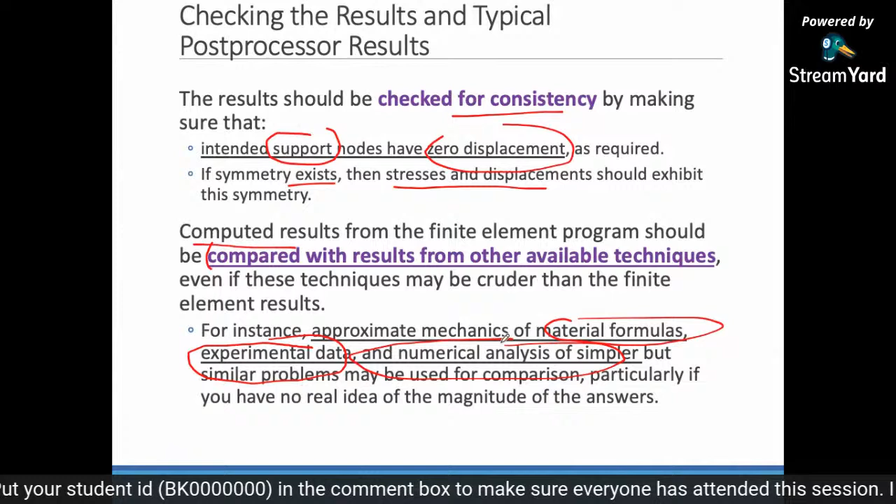Then the last part will be when we try to validate our results. What we need to do is compare our result with any kind of technique. It can be anything from the theoretical part, from formulas, from experiments, or we can also do FEA. As I say, we can do a preliminary FEA, get an idea of how it behaves, then remesh it and see whether this behavior changes. And if it changes, we have to understand why. We have to compare so that we can justify what we present.

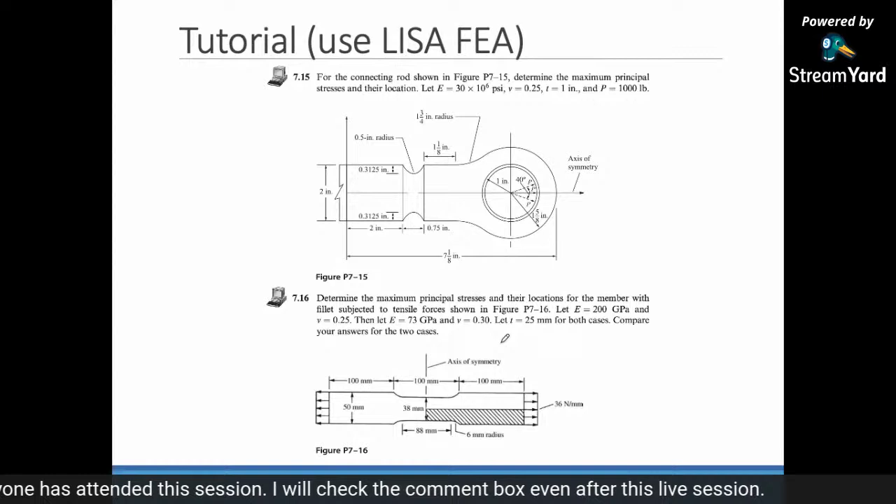So here is a tutorial for you. You can try this tutorial in LISA FEA as well. If you don't have it, maybe you can try other software. If you can't, you can skip this, right? This one is for those who really don't have a computer. So I recommend you try this. So that's all for this lecture. Any questions?